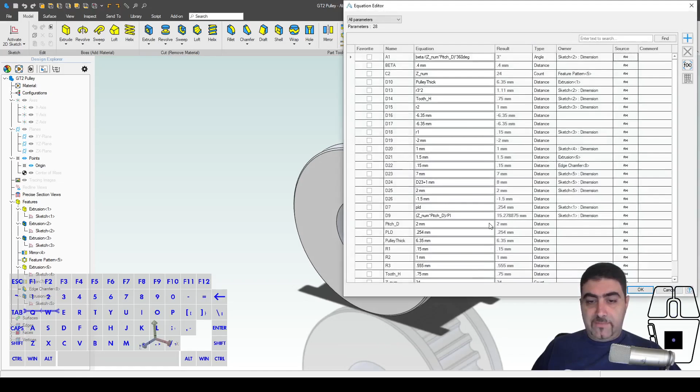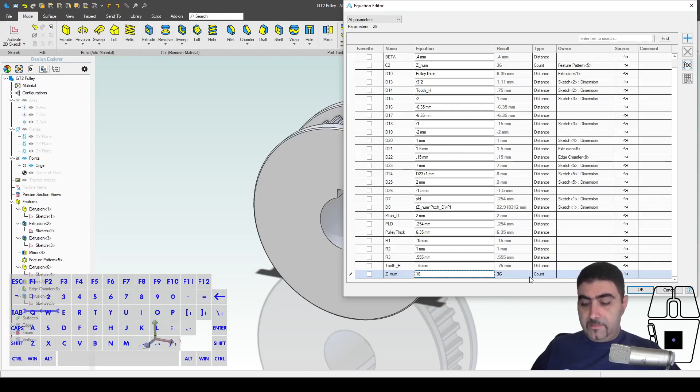I've set up all of the equations here. Let's say now it's a 24 tooth pulley. Let's say that I want to make it a 36 one. There you go, it adjusts automatically. Or if I want to go back and make it an 18 teeth one, there you go, you get half the pulley.

Now you saw that the bore and keyway do not update parametrically. Well, we're going to connect these to Excel. So let's start by making the parts in Alibre first, and then let's connect them to Excel.

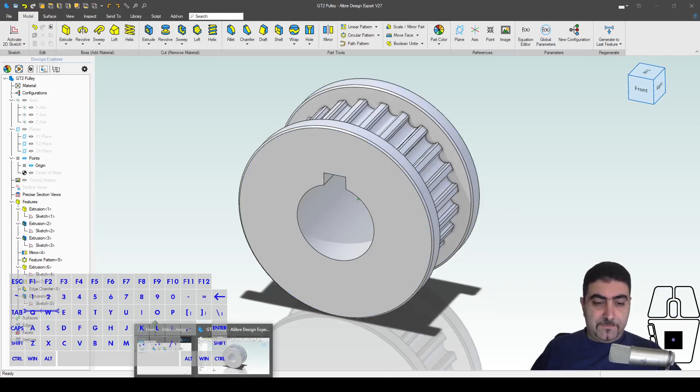So of course, I'm going to make a new part. I'm going to call this Excel shaft. I'm going to go not too quickly, but at a normal pace. I will be doing stuff that I have shown before.

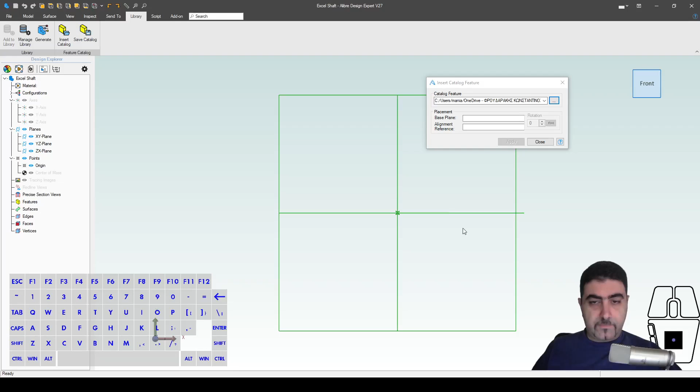So here I am just using a catalog feature to create the shaft, which will have 3 segments. And I've made this catalog feature so I can bring the segments in and then dimension them.

So let's say that this is going to be a diameter of 7. So this is going to be this plus 2. The first segment is going to be the bore of the pulley. The next one is going to be a step to butt up the pulley against, and the third one is going to be maybe for a bearing or something.

Now these are the diameters. So the bore of 7 plus 2 millimeters for the step, and plus 2 is enough. Yeah, it should. Let's give it plus 4. And then same diameter for the next segment.

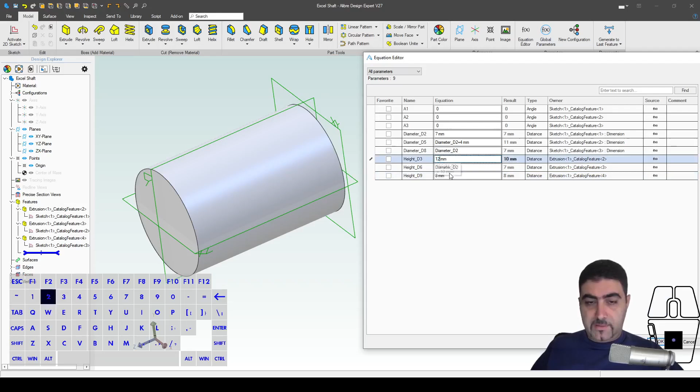First segment is going to be 10 millimeters. This is going to be, let's make the stop a square dimension, same diameter and the length. And the other piece is going to be 8. Let's make that 12. Okay, as soon as I hit OK, I get my shaft.

This is the piece that the pulley will go into. This is the other one, and this is my stop. Okay, so I just made my Excel shaft.

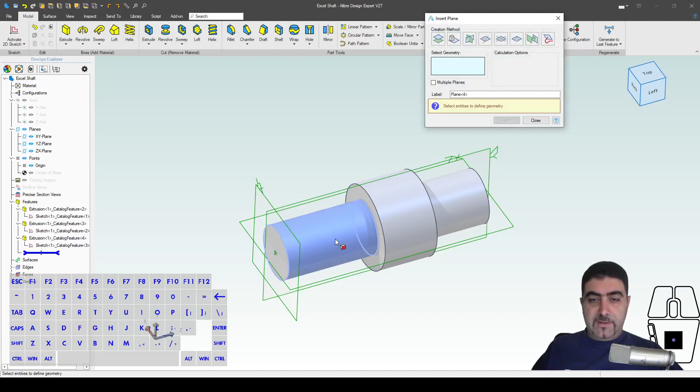Now I want to make a key slot. So I want to make a plane. I will select the cylinder and another plane to give the direction. I don't want it there, I want the reverse one. So there we go. And now I'll sketch here.

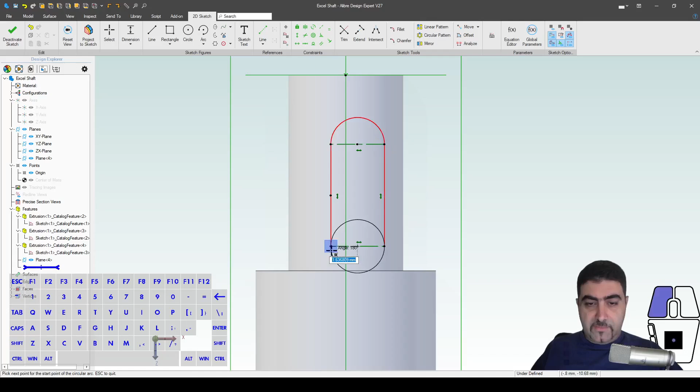And of course, to design the key slot, I'll make a rectangle. I'll select these 2 lines, make them construction, and then finish it off with center arcs. My pulley is going to have a total width of 1/4 of an inch, plus 3 millimeters, because I have a 1.5 mil shield either side.

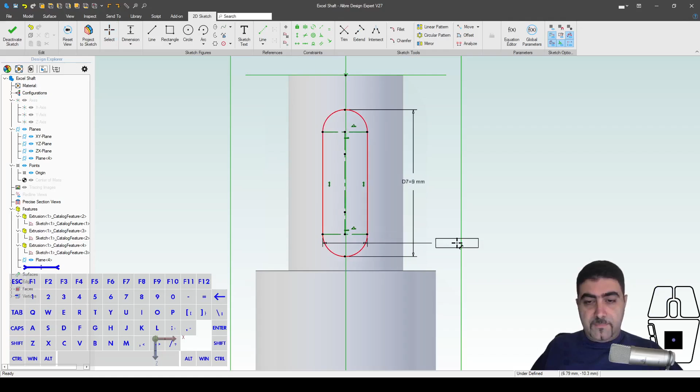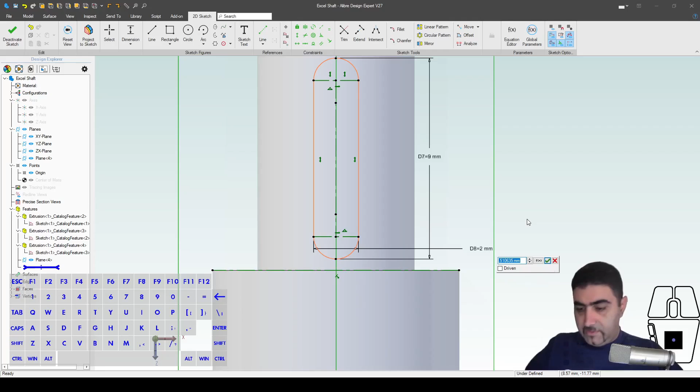So let's say 9.35. I'll just make this 9 millimeters. And then I just have the key width there. I want to center it, and in order to distribute the key equally, so this is 9, the pulley is 9.35. So if I make this distance 0.35 divided by 2, we should be fully defined.

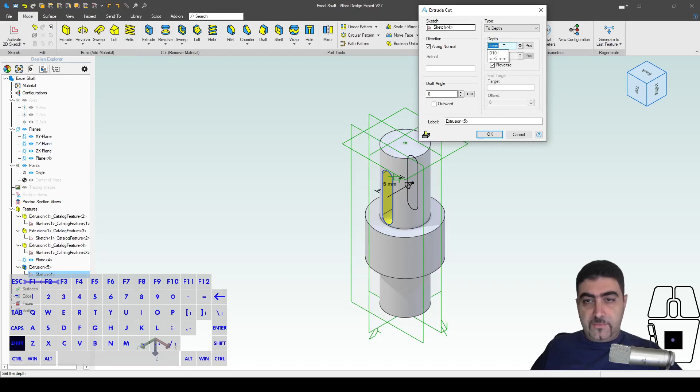So this is a 2 millimeter wide key. These are usually 2 by 2, 2 width and 2 height. So I want to cut into the shaft for 1 millimeter, and then it'll be 1 millimeter inside the pulley. And there you go, our shaft is ready.

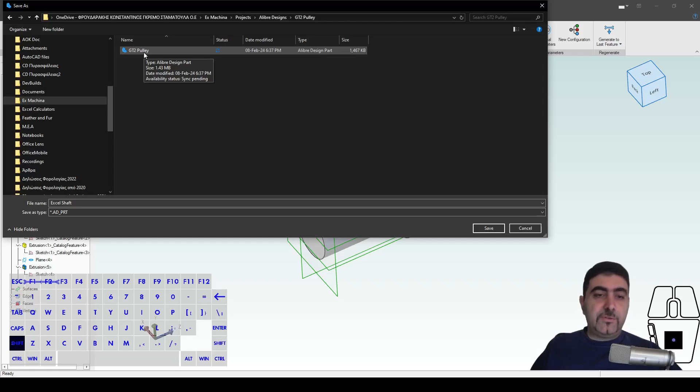Okay, so let's save this. Let's save it at our GT2 pulley file. By the way, I did mention that this is a timing pulley metric GT2, so 2 millimeters of pitch. So let's save that there.

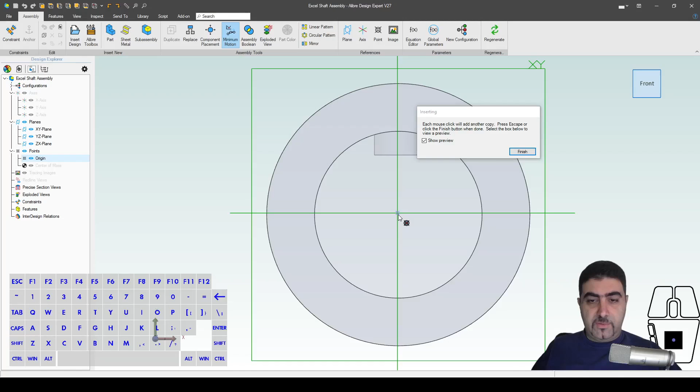Now to make the key, I'll just create the assembly and make the key inside the assembly, as a top-down manufactured part. So let's place the shaft in the center. Right, we want it this way. Let's anchor it, and then I'm going to open up a new part, and this is the Excel key.

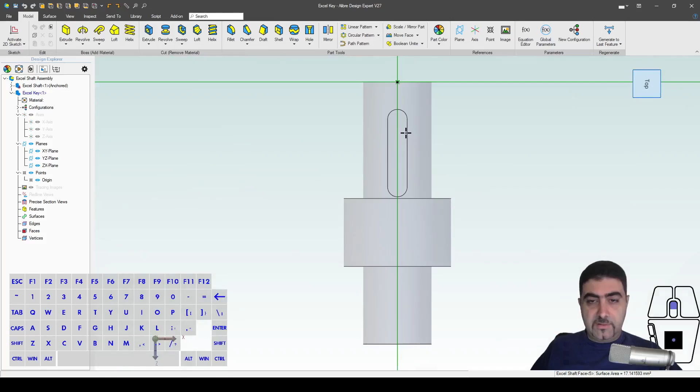And how am I going to make this part? Well, I'll sketch on this face, bring it in, and extrude for 2 millimeters. And that's it.

Top-down design is beautiful, isn't it? Now, of course, I should be accounting for tolerances and stuff, but I'm not going to worry about that now, because this is just a demonstration, right?

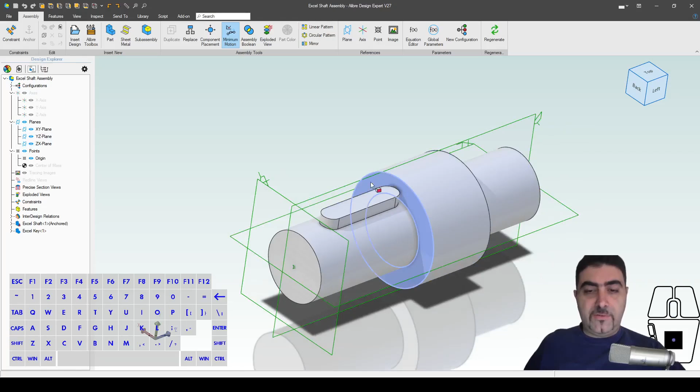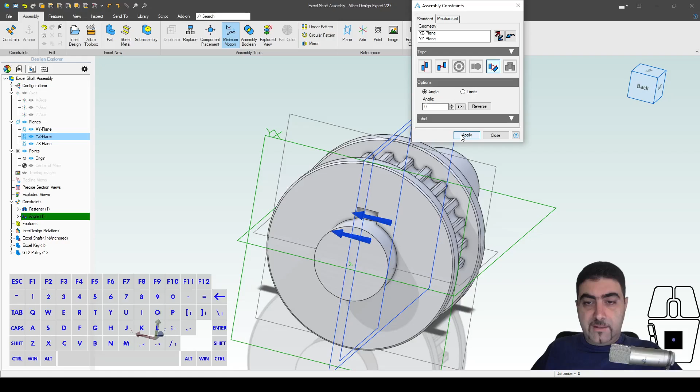So I have my key. Now I'm going to bring my pulley in, and I'm going to constrain this by giving it a fastener constraint there. Then I'm going to show my references and make sure that these two planes are at an angle of 0. Okay, so this is our assembly basically, right? This is what we'll be working with.

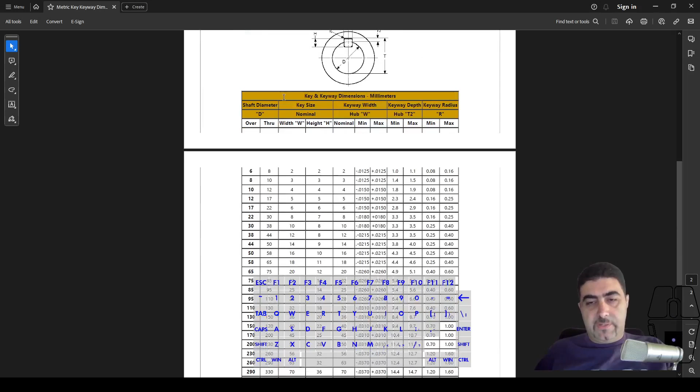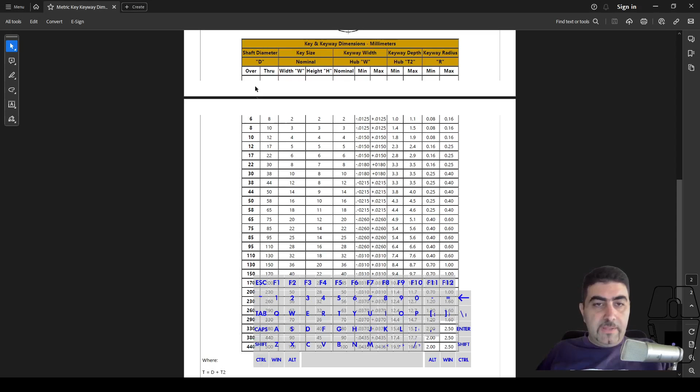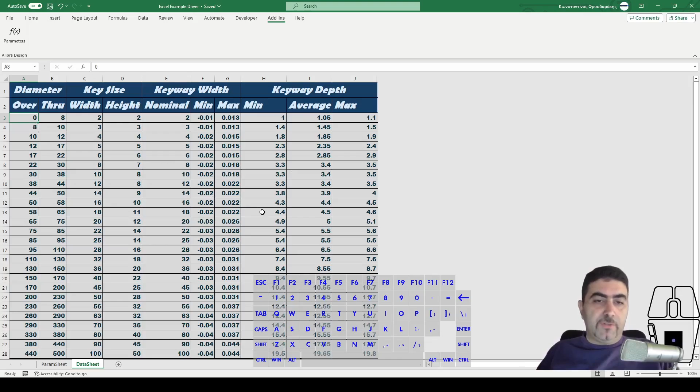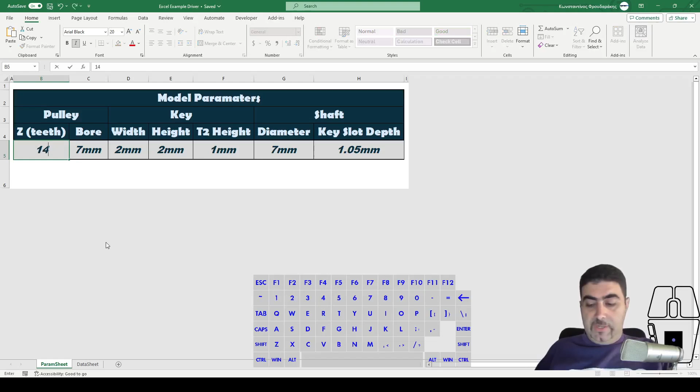And I took these numbers, manipulated them slightly to only keep what I need, and put it into the file. And also, this starts from 6 millimeters, whereas I just made this 0 so that any bore size I select produces a result. So this is like a database of values, and this is like the front end. Okay, and you can see that as I change these values, it updates accordingly, right?

There you go. So how do we connect this to the part files in Alibre? Well, first of all, you need to install the Excel add-in if you haven't already.

The help file is very, very good at giving instructions on how to install the Excel add-in, how to relink files that become unlinked. By the way, I will have these files available in the Alibre forums, but you will have to relink the Excel file if you download them. I will also have the Excel file there. If you download it, you need to relink it because the file path is different, and you can find out how in the Alibre help file.

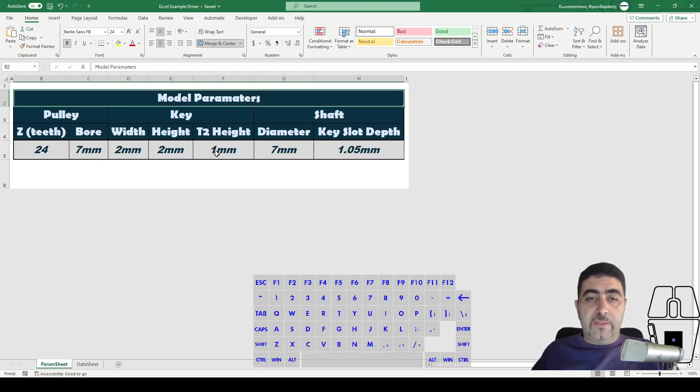But on top of everything else, you need to go to your developer tab, which if you don't have, just right click somewhere in the ribbon, customize ribbon, check this check mark, and you'll see it. Go to the Excel add-ins, right? Not add-ins, not COM add-ins, the Excel add-ins, and you need to make sure that these 3 add-ins are inactive, right? They are unchecked. If they are checked, you need to uncheck them, click OK, and restart your Excel

So that they are inactive. The reason for this is that these 3 add-ins will interfere with the Alibre add-in, and it will not be able to work. And the first time I tried to use it, they were on, and the add-in wouldn't work, and I didn't know why. So thanks to David J from the forums for that tip, because it allowed me to work with Excel and Alibre and really, really opened up new frontiers for me.

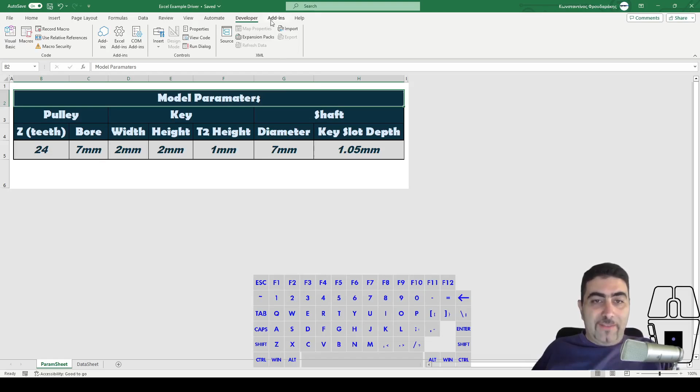Anyway, so there we are. After we've installed it, if you go to the add-ins tab here in your menu, you'll see this button, Alibre Design FX Parameters. You click it and this thing pops up. So we've got session, configuration, and some parameters here.

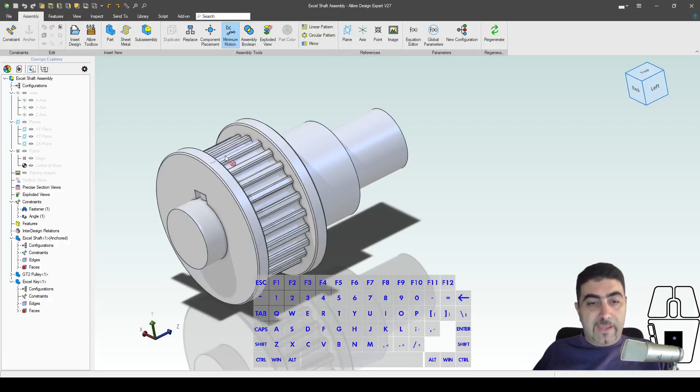Now, if you go to session and click here, you will see that it basically shows the parts that are currently active. Okay, now, currently, I only have this assembly showing, okay, but it recognizes that there are these parts inside the assembly, okay, so it considers them active as well. And what you see here are the parameters of every part.

So in the assembly, the only value I have is from that angle constraint, okay. I don't want to change that. So let's go into the pulley and look what it does. It brings in all of the parameters from that pulley, okay. So how do I link these parameters to work with these numbers?

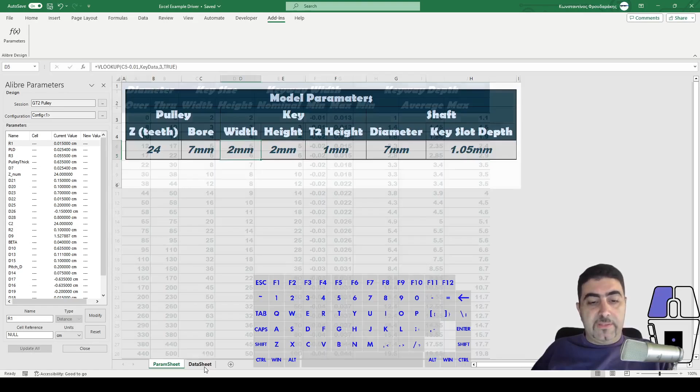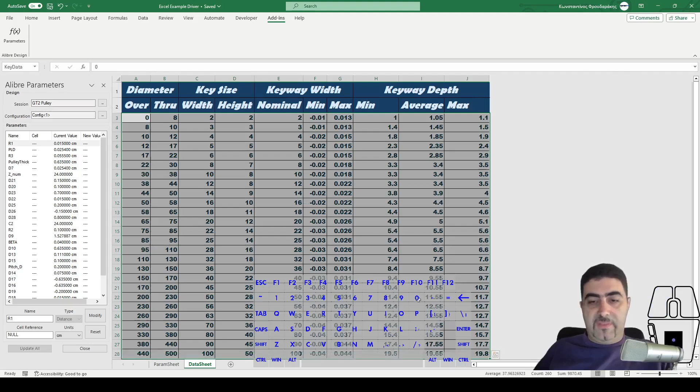Now you will see that, for example, I have the teeth, but in the bore I've got a function, an Excel function, right? I'm calculating the diameter, dividing it by 2 and rounding down to the nearest integer. So then I have Vlookup functions. The KeyData word that you see there is basically this table, right? You see that as soon as I select all of it, instead of some cell value or whatever, when I select all of it, it says KeyData here. I have named these cells as KeyData, okay? It's an old Excel trick.

And you've got VLOOKUP functions. I have linked the shaft diameter to the pulley bore. So I want to drive the pulley design and the shaft design and everything from this Excel spreadsheet.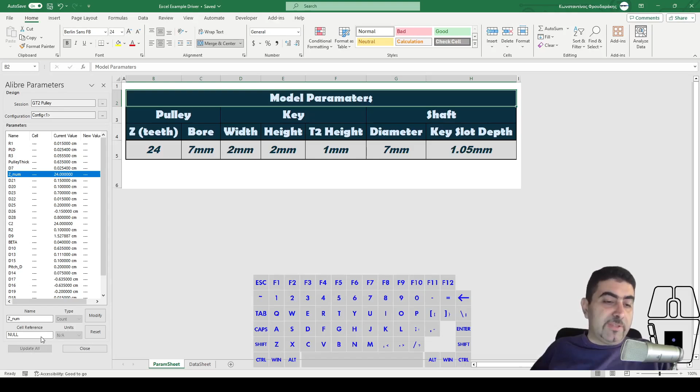So how do I do it? Well, the Z_num parameter is already there. I just want to drive it from this cell. So I click on this parameter. It tells me that the name is Z_num, type is count, no units available because it's a count variable. Cell reference - when I click on it, I get this dialog opening. I select the cell, hit OK, and then I click on modify.

Now what happened is that the two files are now connected, and there's no way to disconnect them, or at least there's no command to disconnect them. What you need to do, if you really need to disconnect the spreadsheet from the part file, is go everywhere this variable is used, delete it and replace it with a value. After you've done that for all instances, you'll be able to delete it in the equation editor - you can do all of that there. And when you've done that for all of the linked files, the part file will be considered unlinked. But it's a process, okay?

So now I also want to drive the bore from this Excel file, and I might not remember which dimension exactly the bore is. It's actually D23, but anyway, I might not remember, or I just want to have a variable named bore that is driven from this Excel spreadsheet and drives that value.

So I click reset so that nothing is selected. I write in a new name and select a type - this is distance, units. Now it needs units because the Excel file numbers are unitless. I just put these in, but that doesn't give it any meaningful physical unit. So I need to tell the add-in what units I am working with - so I'm working with millimeters.

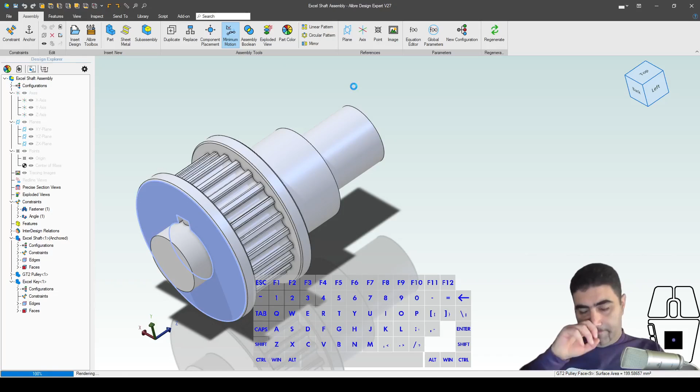However, I want to go in here, open it up, and use the variables I newly created to drive this cutout. So I'll just double click on the surface and it'll open up the sketch from which it was created. And I want to put in bore - you see it's not throwing an error, it's finding that variable. So I want to put it in there. So here, D23, well that's bore already, plus key T2.

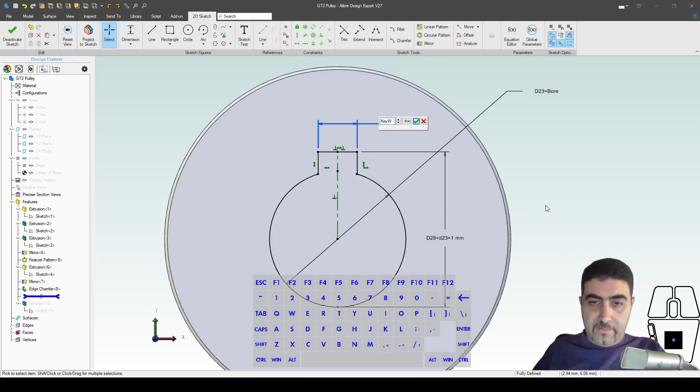Yeah, the name didn't update, but this is updated. And I want to say that this is key width. Okay, regenerate everything, and I'm good to go. Now I just want to show you this - if I open the equation editor, I get an error message saying that there's an external reference that's missing.

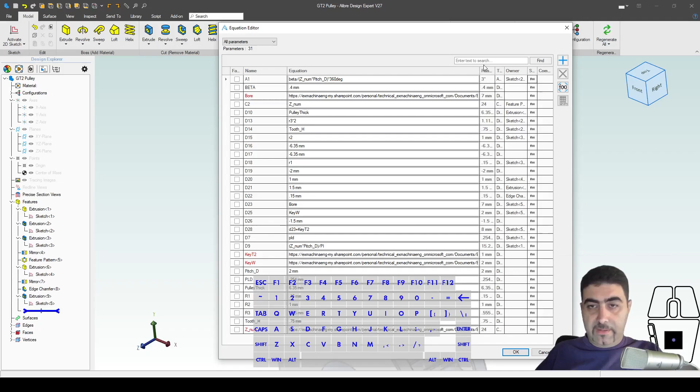What it means is that these parameters we just made are showing in red, and they're supposed to be missing their external reference. However, you will see later that if I change these values and update, they will update. So sometimes you get this error message and it's not true. I'm guessing that if you unlink it from a spreadsheet and relink it, that value gets stored somewhere and it's missing that other reference. In any case...

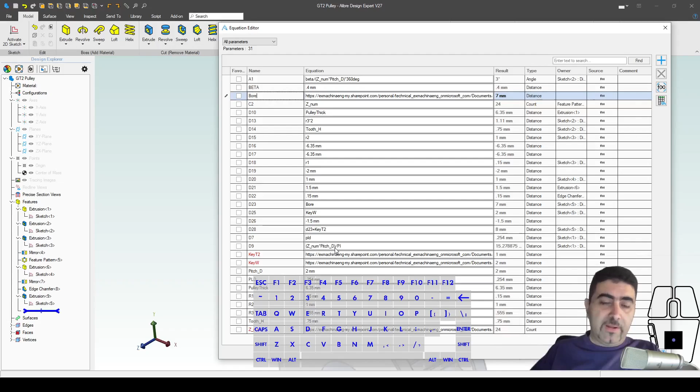Now let's go back into the Excel file and do the shaft. I happen to know that this diameter D2 value is the diameter of the shaft where the pulley goes, and we've done some equation linking of these values, if you remember. It is now 0.7 centimeters. But look, I want to link it to this, which is 7, first of all. The value is 7, but it's also in millimeters. How do I do that?

Well, I click on the cell reference. It's null, I select it. But before I click modify, I'll need to go in and change the unit to millimeters, because if I don't do that, then the shaft will be 70 millimeters in diameter, and that's not going to work. So we linked that again.

Now what else do we need to do? We need to link the key width for the slot, right? That's the only parameter that we need for the key slot, and we also need the depth for the sketch of the key slot, and then you extrude cut with the depth.

Let's add these values. Reset, and that is the key width. What is the cell reference? That is the cell reference. It's a distance, it's in millimeters. Let's add it. Cool, reset.

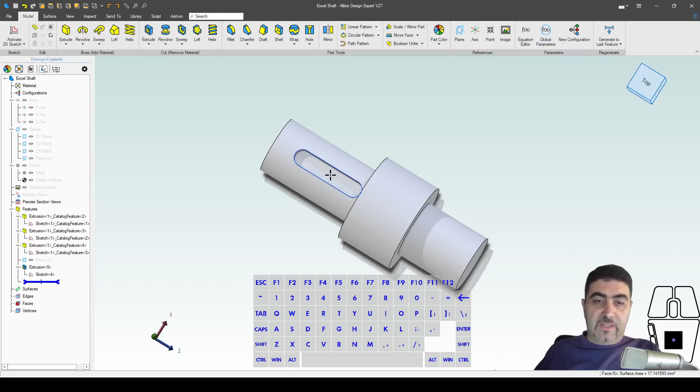Let's go change this sketch, this part file, so that it uses these values. So now if I go in here and say key W, it finds that variable. If I click OK, no errors, right? This works. Yep, there you go.

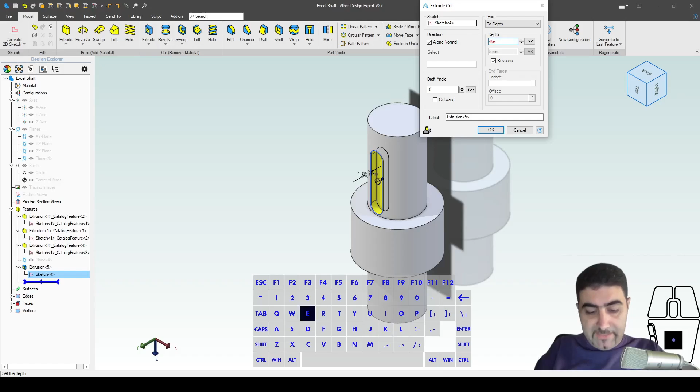So now this is minus 1.05 and we want it to be minus key depth, right? There we go, that's linked as well. Let's regenerate that.

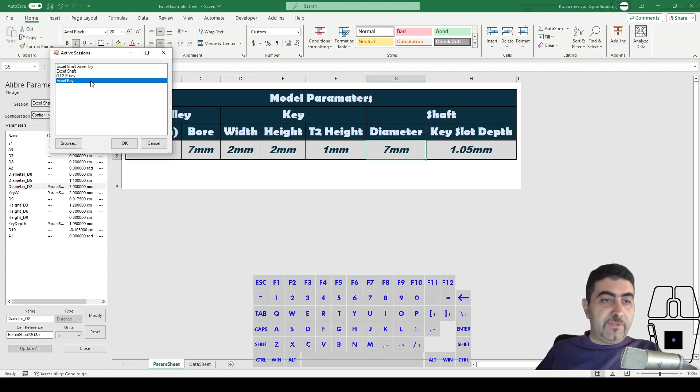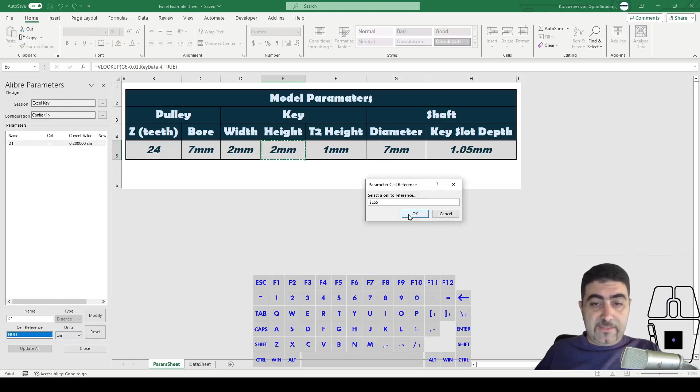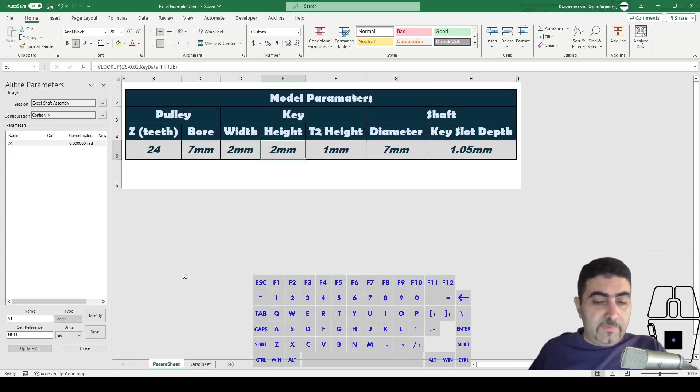Okay, and finally we need to make our key. Now the key, the shape of it, is just the slot projected into a sketch, right? So the only value that it has, the only parameter, is the height, and we need to link it there. So I'll take this parameter, which is currently in centimeters, and I'll say that this is the cell reference that'll drive you, but you need to be in millimeters, and modify. Okay, cool, now we've pretty much done everything that we needed to do.

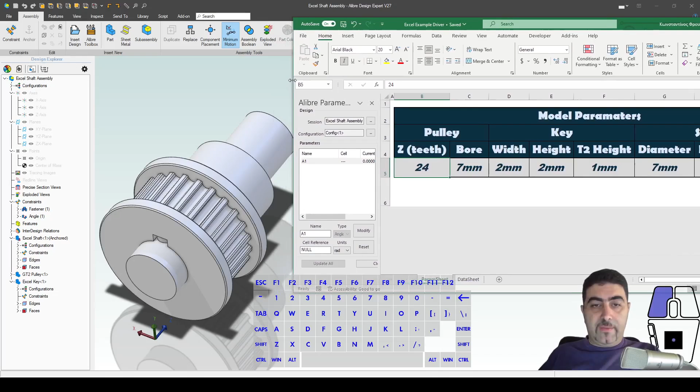We also need to save everything, and let's see. Is this thing working? Let's bring it side by side. Let's say that I want a pulley with 36 teeth. I plug in 36. The values change, right? The lookups, yeah, they're okay. So the values change. Nothing changed here because I need to go in and select the parts.

Okay, now if you see here, current value 24, new value 36, right? Current value 7, new value 11. So it's recognized that there are changes going on. And if I hit update all, it'll take a while. And there you go.

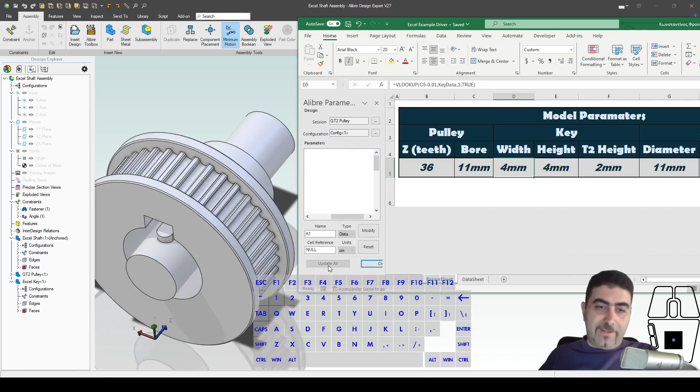You have a new pulley. That's exciting, guys, I don't know for you, but I love this stuff. We have a new shaft. And let's get our new key, update that as well. There you go, we have a brand new assembly.

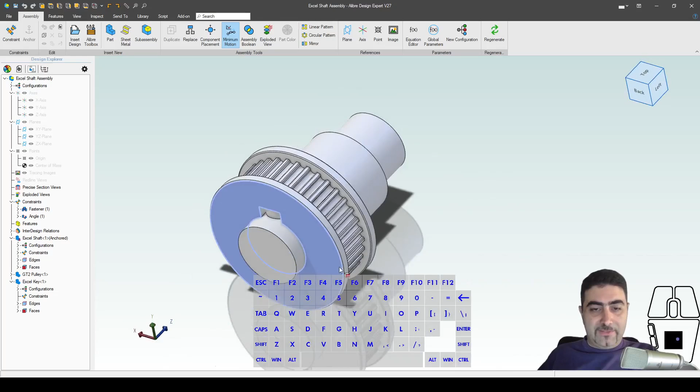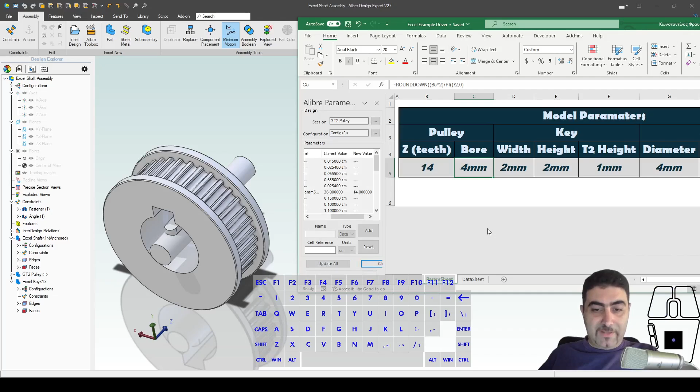Let's do another example where we make a smaller one. Let's see, 14 teeth. Let's do the shaft first this time, and then we'll do the key, update, and then we'll do the pulley. It'll take a bit more time. Update. Did I click it? Update. There you go, new assembly.

So guys, this is amazingly powerful, right? You can see that you can drive an entire assembly just from the Excel spreadsheet parameters, and you can have references to other spreadsheets, references to other workbooks entirely, and they will all work, and you can bring all of that into the part files that you have linked. And this is even available in Alibre Atom 3D.